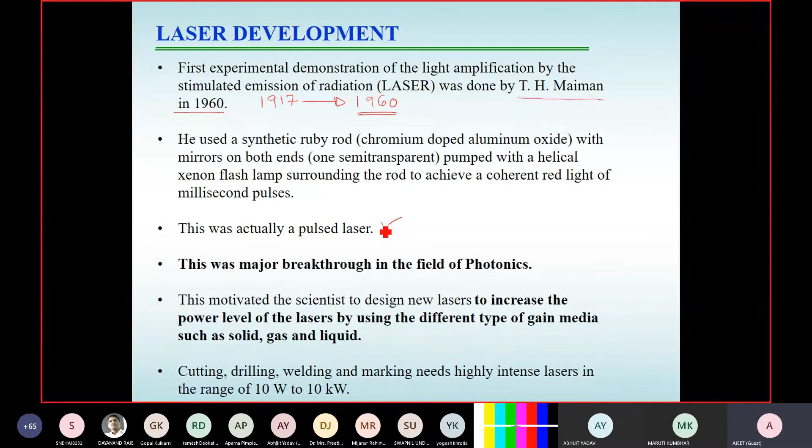The idea was given in 1917, but the first experimental working laser was invented in 1960 by Maiman. That was basically a ruby laser, in which he used a ruby rod as the gain medium. He polished both ends—one fully reflective and one transparent—just to make a resonator, and for pumping he used a helical flash lamp. So all three components were used, and this was basically a pulsed laser, not a continuous wave laser. It was low power at that time, but this was a major breakthrough in the field of photonics.

I read somewhere, maybe in the book written by Professor Ghatak, that the two major inventions of the 20th century were the laser and the fiber. These have changed our life tremendously, and most of us, including our faculties, can appreciate this because they have seen it happen in their lifetime. Earlier we had telephones, then mobiles came, and now today we are transferring video using this platform without any interruption. This has happened because of two things: lasers and fiber. So even when we talk about a semiconductor laser or any laser, the invention starts from the first major breakthrough—the invention of the ruby laser.

Yes, any question? Hello, please continue, sir. Okay, I thought there was a question.

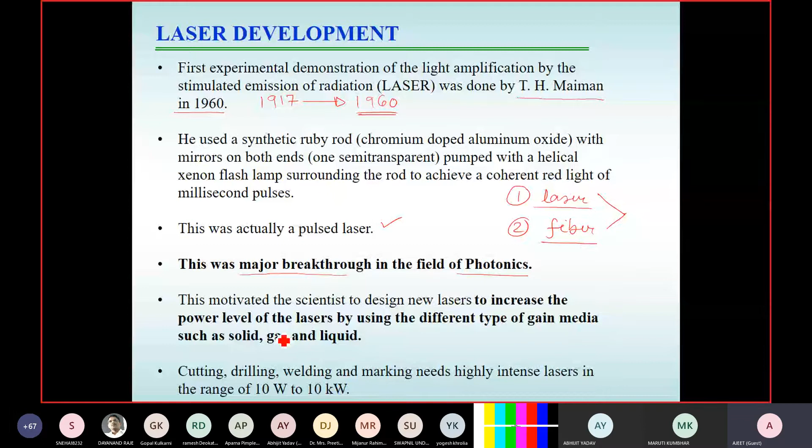So this invention of the ruby laser motivated scientists to come up with new lasers using different gain mediums like solids, gases, and liquids, and to try to increase the power level. Just to summarize the laser development, I have quoted this: different mediums have been used, and with these different mediums, you have different kinds of lasers working at different wavelengths, having a variety of applications—some industrial, some medical, and of course lab applications. But out of these, I'd like to address the carbon dioxide laser.

The carbon dioxide laser is one of the highest power level lasers available in the market. I'd like to mention this because the invention of this laser was made by a scientist born in India, Professor C.K.N. Patel. I recommend that if you have not gone through his life story, you should read about it—it will really motivate you.

This carbon dioxide laser was invented by this Indian-born scientist while he was working at Bell Labs. He did his BE from a government engineering college affiliated to the University of Pune, then moved to the US for his MS and PhD. After his PhD, working at Bell Labs, he invented this laser. Whenever I give a talk or interact with my students, I always mention the carbon dioxide laser, because it was invented by an Indian-born scientist who is still alive.

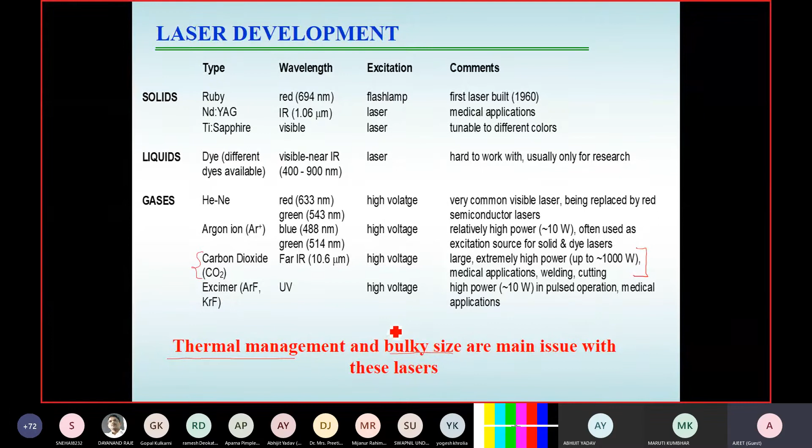Whenever you want to use transportation, or you want your system to be compact, and you want to make the laser up to a particular level, then you look for some substitute. One of the substitutes suggested is: why not look for a fiber laser?

After the invention of the fiber, around 1960 or 1964, there were so many inventions done in that period. In 1966, the fiber amplifier was designed. So they said that if you use fiber as a host material, and try to design a fiber laser or waveguide laser, that can be really handy for you.

One advantage is that they are not bulky, they are light in weight. If you are able to go up to the required power level, or even close to that, it will be really helpful for applications where you want to move your fiber from one place to another. The second advantage is the fiber has long range - you can easily use a kilometer fiber. You just pull it out at the right radius, and you can get a fiber of even 1,000 kilometers. So what this does is, using this, you can actually increase the gain medium length, which is not possible in case of a bulk laser. So your gain medium can be order of kilometers or meters, whatever you require, and your power level can get a large signal gain in that case.

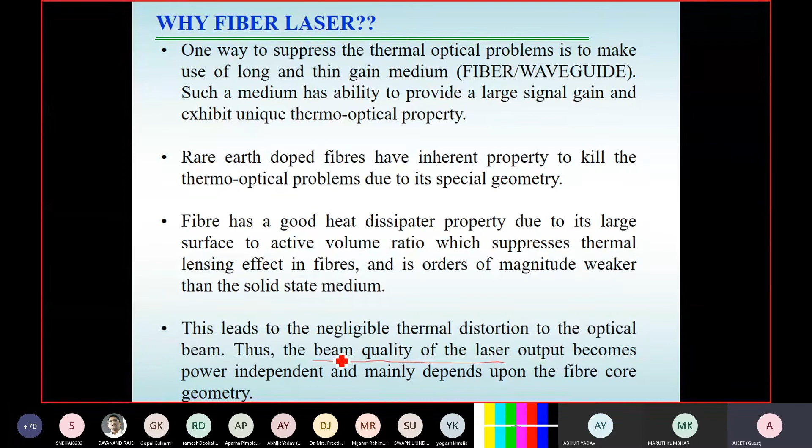The biggest advantage is it's a good heat dissipator because of its large surface to active volume ratio. These are certain points which basically work toward a good beam quality - this improves the beam quality of the laser. So it is suggested that if you try to make a fiber laser or waveguide laser, that can be really helpful in order to get very good beam quality, and that laser can be designed to be very light in weight, and easily transferred from one place to another.

So the same thing I've mentioned here - the lightweight and size, easy to handle - and because of this they have huge applications in defense industry, medical applications, and so on.

Now what you want to do is make a fiber as a host, or waveguide as a host, in order to make a laser. So if you are making a fiber or waveguide as a host, we need to discuss the basic understanding of the waveguide.

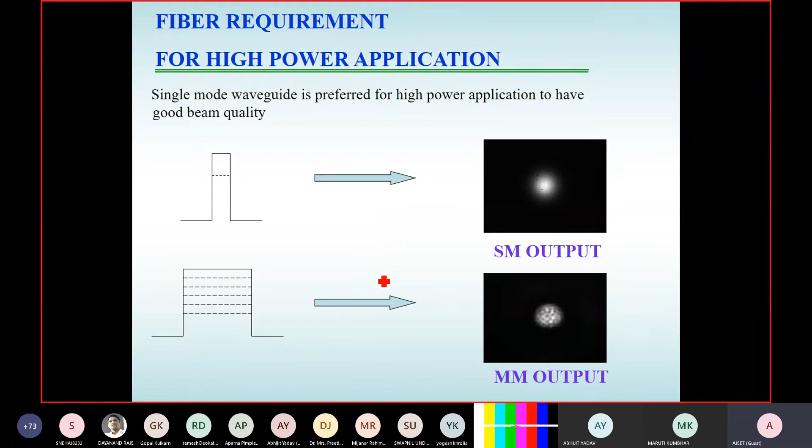But at the same time, I would like to mention that it is not that you cannot use multi-mode fiber for designing fiber lasers. Wherever you are not very much concerned about very fine beam quality, even a few-mode fiber you can use. But one takeaway from this slide is your fiber should be single moded if you want to make this fiber for the use of a fiber laser.

Now come to the other condition. What is the condition for the fiber to be single mode? You need to maintain that, so you should know about it. Okay, what is that condition?

If you look at the fiber, we already know there is a very important parameter called the V parameter. This V parameter should be less than 2.4048 if you're talking about the optical fiber. And if you're talking about the planar waveguide, it should be less than 3.14.

This depends on the numerical aperture, because it depends on a number of other parameters. So if the other parameters are like that, your A should be less than 3 micron here, and A should be less than 5 to 10 micron there. So the point to note here is, for single mode propagation, your core size should be small. There is a limitation that you cannot increase the core size beyond this for given other parameters like numerical aperture and operating wavelength. So this is about a single mode fiber.

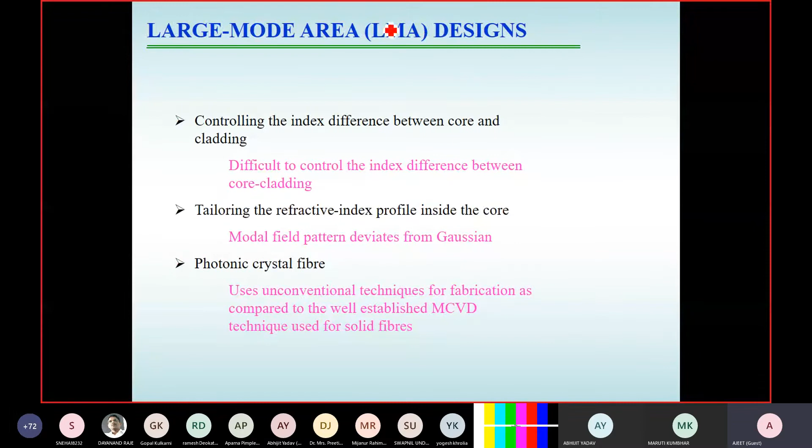In recent articles about fiber lasers, you will see them talking about LMA fibers, the large mode area fiber. I'm not saying this is the only parameter required for increasing the power level - there are so many things, like what kind of pump source you are using, the repetition rate, and so many other things. But one of the key features is the LMA fiber.

So LMA fibers give you large single mode operation even with a large core. Here I've just pointed out a few of them. There are a number of ways of doing it, so a few of them I have mentioned.

One way is by controlling the index difference between core and cladding. This is your refractive index profile - N1, N2, and A. You know the range for single mode operation: V equals 2 pi by lambda times A times n1 square minus n2 square raised to power 1 by 2, should be less than 2.4048. So since this product should be less than 2.4048...

One idea is you reduce n1 minus n2 and increase A such that it always remains in this range. So instead of the usual design, you design this kind of fiber with N1, N2, and A, ensuring you increase A by decreasing the difference between N1 and N2 to stay within the limit. But the problem is, since N1 minus N2 is very small, this fiber is very sensitive to bending. This is one way that has been used to increase the power level.

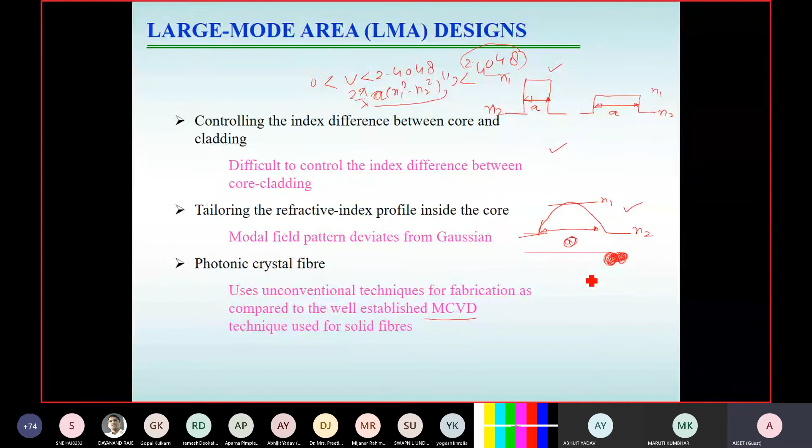So what we have done in the past few years is design a leaky fiber. We have taken the concept of a leaky fiber - what is a leaky fiber? I'll discuss in detail after a few slides. I think I have to be quick now because we have limited time. So for the leaky fiber, what we have done is said, okay, you have a core and a cladding, and you want to increase this.

Don't worry, instead of one mode, let's support n number of modes. You increase the core area, but at the same time modify the cladding. Normally the cladding is uniform, but you tailor the refractive index profile in the cladding, in the radial or angular direction, so it's not a conventional cladding. Instead, we use a different kind of cladding, keeping in mind that all modes will be leaky and suffer finite loss, ensuring the fundamental mode retains very nominal loss while all other modes suffer very high loss.

So here's the idea: if you launch light into a fiber, initially there will be 4 or 5 modes present. After propagating a certain distance L, since the higher order modes suffer high loss, they get filtered out, and you're left with just the fundamental mode. This is called the idea of mode filtering.

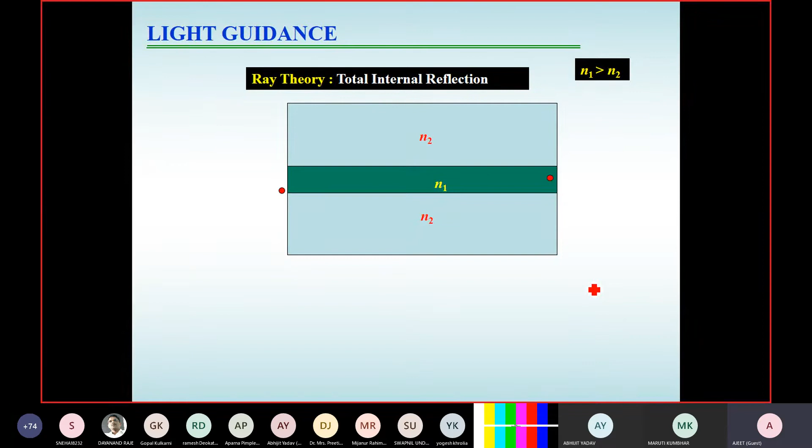So this is, I think, the ray theory. Quickly I'll move towards this. The light guidance in the fiber is understood by the ray theory. We already know the process of total internal reflection, which gives a rough idea of how light propagates through the fiber.

But the actual theory is the wave theory, in which you write down the Maxwell equations and solve them to see what the modes are. Modes are basically the field pattern which propagates along the length of the fiber or waveguide without changing its shape.

So if you have a refractive index profile like this, it gives certain solutions, and these are called the different modes. Each solution has a unique field profile. Just to compare it, you can think of this like the particle in a box problem. So this is about the mode theory.

So this is the waveguide theory, and the output of this waveguide theory is: once n1 and n2 are given, and you apply this, you find out certain solutions.

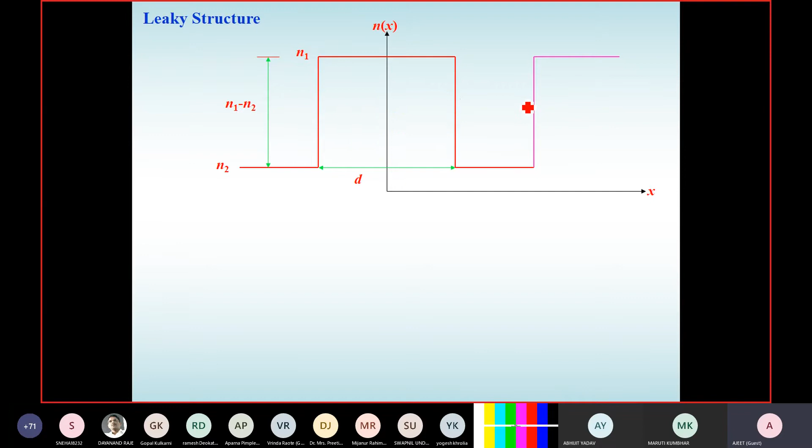So in this case, we know that for the fundamental mode, the loss will be minimum because the propagation constant has the highest value.

Now what about the distance? That advantage is always there for the fundamental mode, but we always want to further increase the loss for the higher order mode. So if you use this kind of structure, the distance will be same for all the modes, almost identical from the high index region.

So in order to get a better difference in loss between fundamental and higher order mode, we said instead of using this design, what if you use this kind of design instead?

If you use this kind of design, the fundamental mode, which you want to retain, will see the high index region at a certain distance somewhere here, and the next higher order mode will see the high index region at a much smaller distance compared with the fundamental mode. So this kind of structure creates a large difference in loss between the fundamental mode and higher order mode.

So this principle basically we have used in order to give the design in case of waveguide and fiber. I think I have two minutes left for these slides, so I will quickly move through this. The first slide we give is for the planar waveguide structure, and I will not go into the mathematical detail which I've already written, since we have only half an hour.

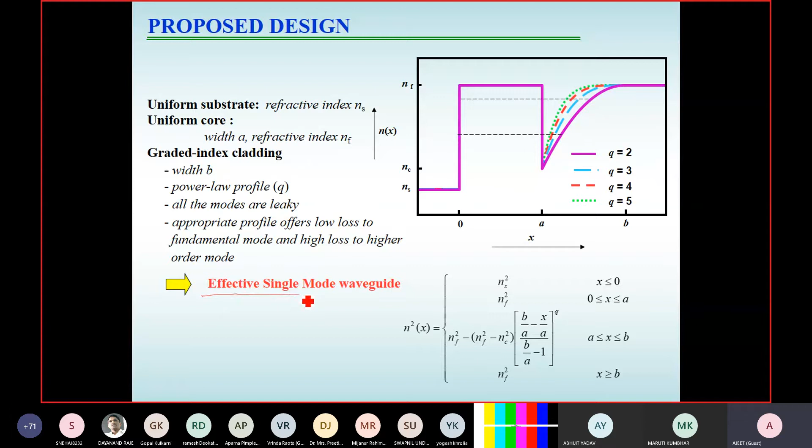So this was the first design we gave for the planar structure, not for the fiber structure. We said you take a substrate which is uniform, and the core is also uniform—you take a large, uniform core. Now instead of a uniform cladding, you take a graded cladding, with a profile defined by this refractive index profile. This kind of structure will ensure a high difference in loss between the fundamental mode and higher order modes, and will show effective single mode operation. We don't say it is single mode operation—it is effective single mode operation, because it shows single mode behavior only after a certain propagation length.

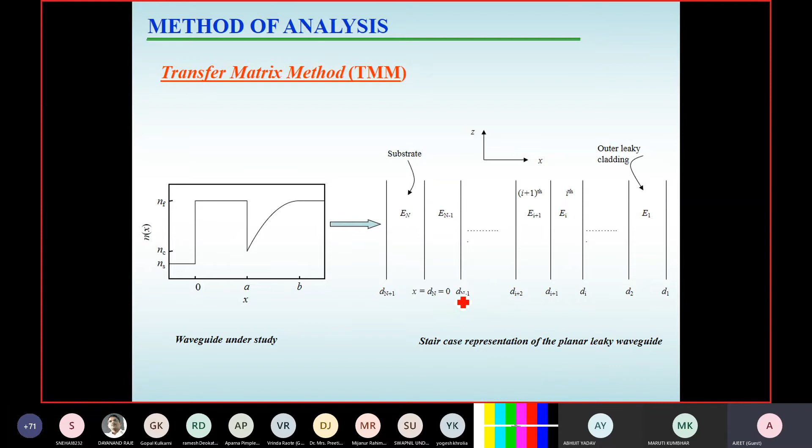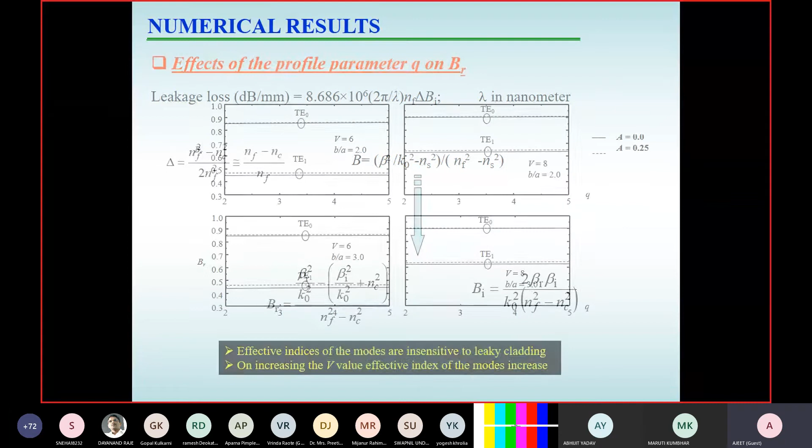See what we have done. First, we tried to see if there is any difference, any effect of this profile parameter, this structural parameter on the cladding, on the beta, which is the real part of the propagation constant. You can say this is the effective index of the modes. You can see here that the N effective is not going to change with this Q value.

This is good because the dispersion property of the new design and the normal cladding structure are both the same. So we are not worried about any new unwanted effects. We have checked this for various values of the V parameter and the B by A parameter, and even for various designs like symmetrical waveguide and asymmetric waveguide.

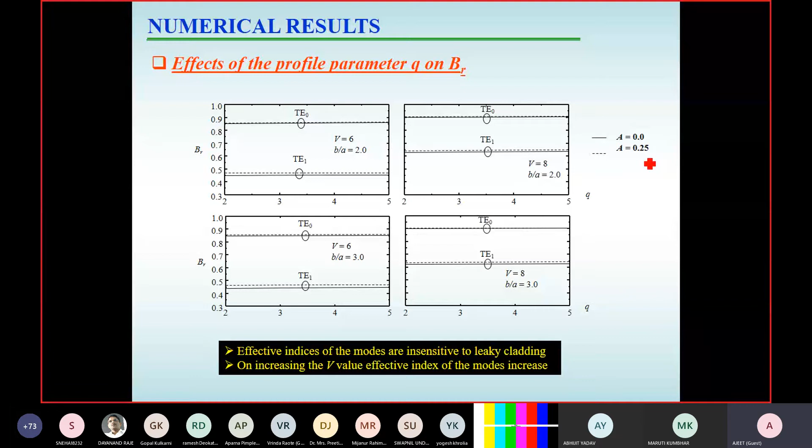Now next we have seen the effect of the V parameter. We have done it for 6, 8 and 10, and we got the obvious result that when you increase the V value, basically it means you are giving tighter confinement to the light inside the core. So most of the power will be there in the core, and a small amount of power will go to the cladding, so the loss will be small.

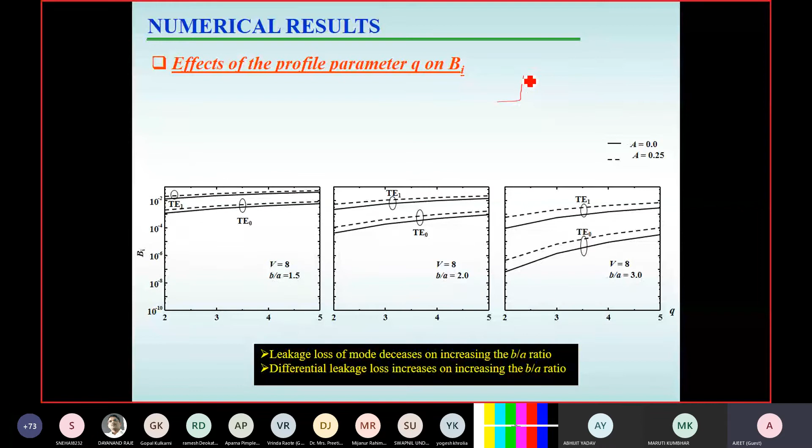Next, we have shown the effect of the B by A parameter. What is B by A parameter? This is your A and this is your B. So small B by A means a very steep profile, and large B by A means this kind of profile.

So it's very much clear from here: if you take a large B by A, the loss will be small. For the large B by A, just look at the loss, it is small. So whatever the expected result, we got it, but another point you can note from here is that, for all these design parameters, the differential leakage loss is almost the same across the entire range.

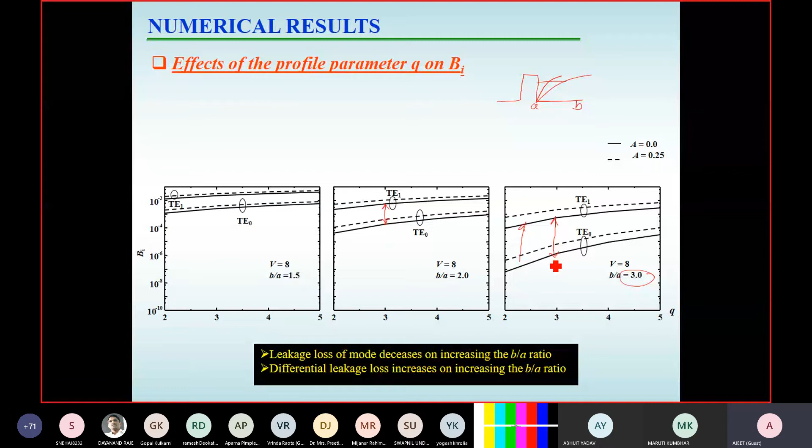If you want to change the differential leakage loss and absolute leakage loss, you can tune it using the B by A value. So if you increase B by A, it will basically increase the differential leakage loss for a given Q value. If B by A is changed, here see the differential leakage loss is this one, and here it is this one. So if you are designing some waveguide and you see that you need to change the differential leakage loss, you know the idea is just to tune the B by A value.

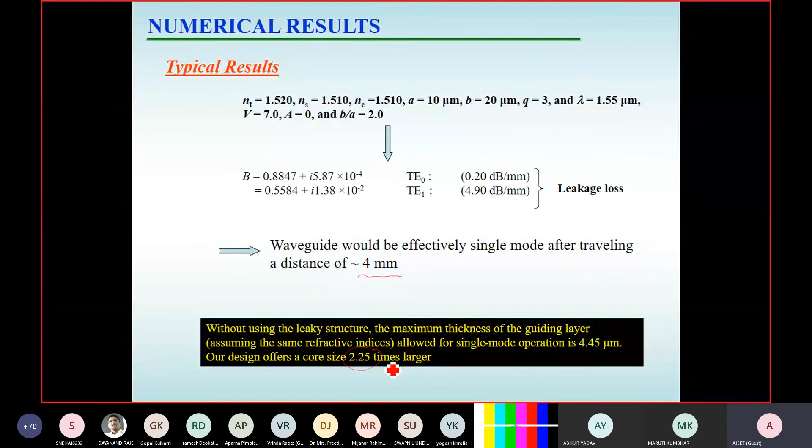So we have done certain calculations, and based on these calculations, you can say that this kind of structure is able to show effective single mode operation with only a 4 millimeter propagation distance. And the size we are getting here is almost 2.25 times larger than the conventional structure size.

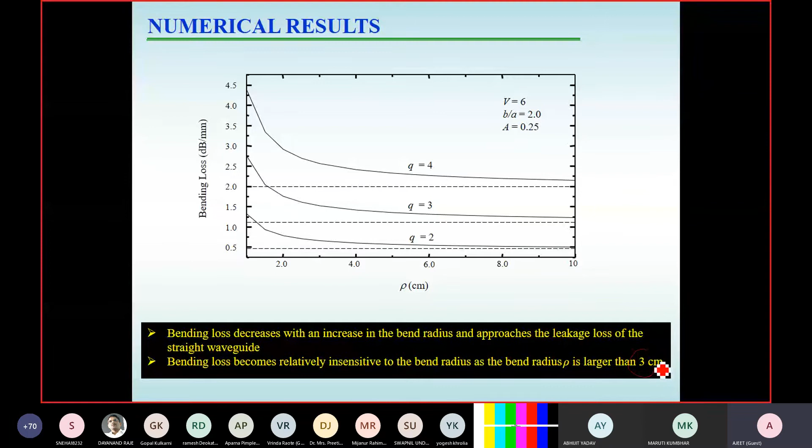Bending calculation we have also done. We tried to find out the bending radius beyond which the bending loss is insensitive. So we found it out: it is a 3 centimeter bending radius.

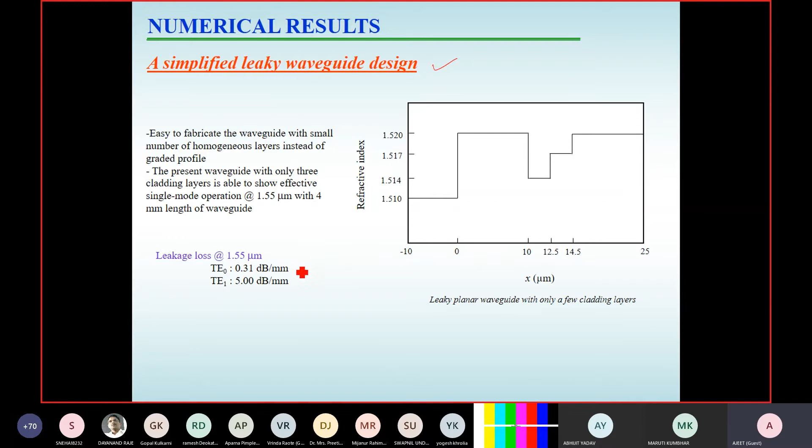Not going into detail, but you always need to come up with a simplified design so that it can be fabricated. So we have also given a simplified design. Instead of giving the graded index, we have given this kind of step structure, and for this step structure we have also shown that you can get a similar kind of loss profile to get a better result. Okay, so this is about the planar waveguide.

Why have we given this structure? Because we know that experimentally it is always possible to fabricate low and high index regions instead of a graded index, so we have given this kind of design.

We have changed the value of the low index region, governed by a Q value. Why have we done this? Because if you just randomly try something, it will not give you the idea, since you have to analyze all the parameters in detail if you are doing theory.

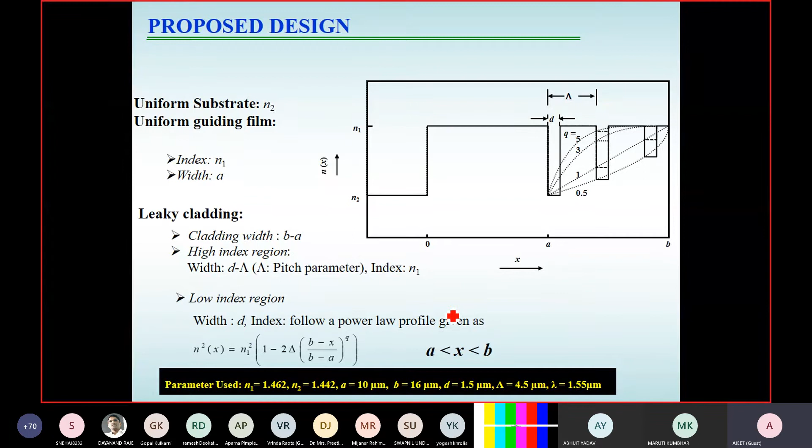After giving this kind of design, we got a result that was initially really disturbing, because we were not getting what was expected. The expected thing is that the lowest loss is for the fundamental mode.

Then you have the loss of the next higher order mode, and then the loss of the next higher order mode. When I tried this, I saw that initially the same trend follows, but then this loss was crossing the loss of the next higher order mode, which was initially disturbing.

When we realized it, we found out it is because of a special effect of physics called resonance. Because of this resonance, a new idea came up for a new design, and this actually solved our problem.

After analyzing, we found that if you take Q equal to 1, that gives very high loss to the higher order mode, 10 dB per mm, and just 2 mm length of fiber can filter out all the modes, with core size almost 3 times larger than the known one. This gave the idea about how much waveguide length you can use for single mode operation.

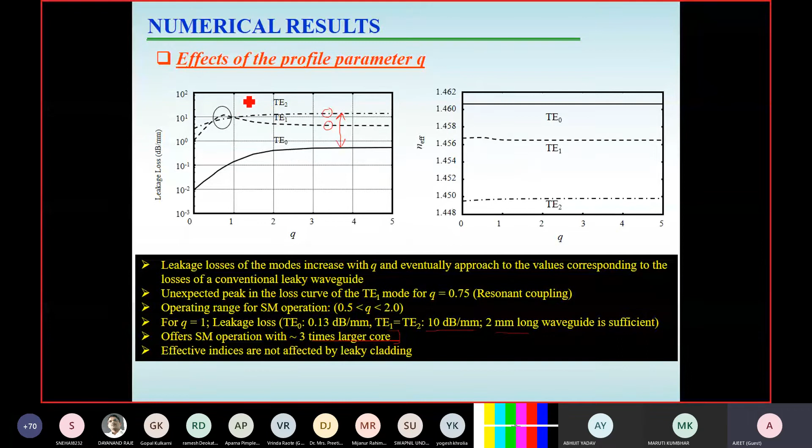But beyond that, it gave us a new idea to design a fiber, and we used it in the fiber design, also after some time.

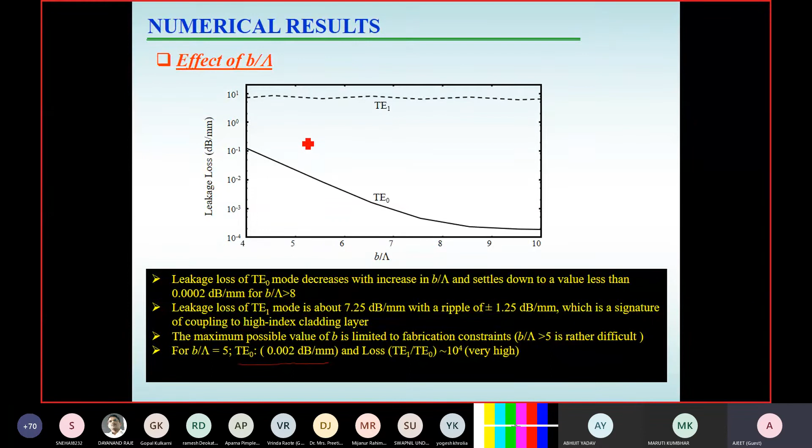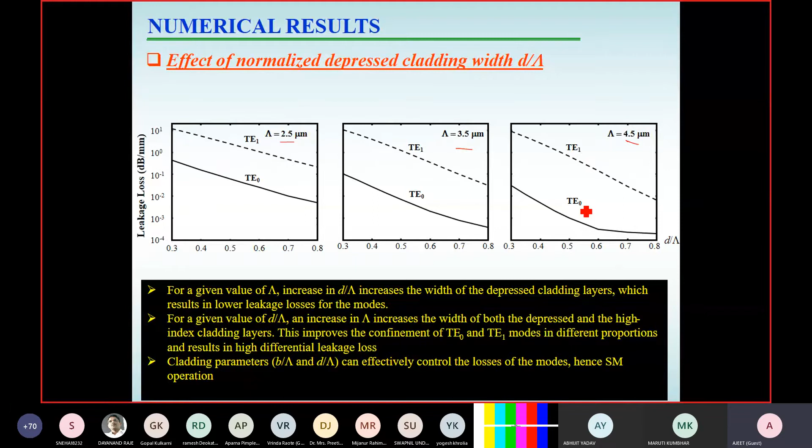So all these calculations basically help the designer come up with a better result, up to the requirement of the experimentalist.

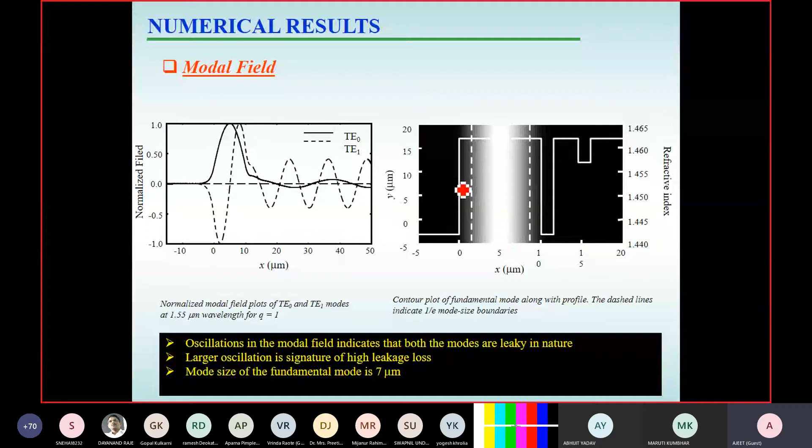Here we have shown the field profile of the fundamental mode and the first higher order mode. You can see huge oscillations in case of the first order mode, but there is also some oscillation for the fundamental mode because both are lossy. Here we have shown the contour plot of the well confined fundamental mode inside the core region.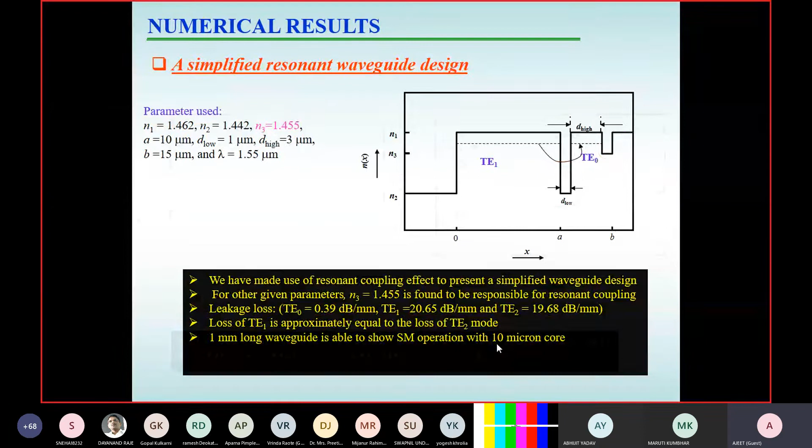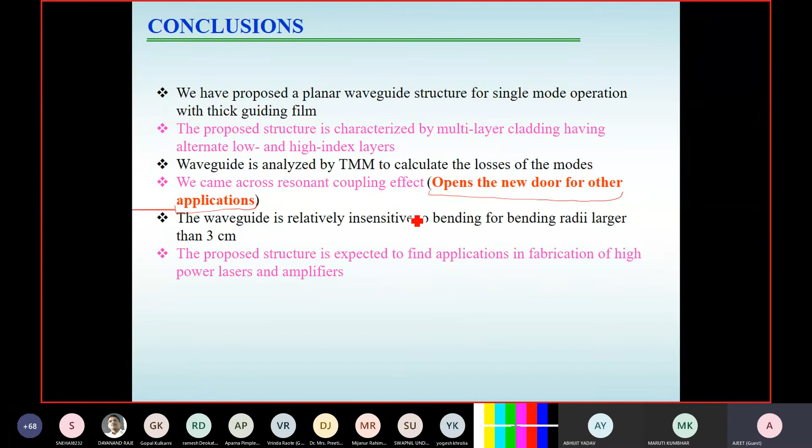Again, for this structure also we have done the bending analysis. One of the key results was, if you're careful about the result you are getting, sometimes you get very interesting results, and if you analyze it beautifully, it will help you come up with some new designs, which may even simplify your design. So we came across this resonant coupling.

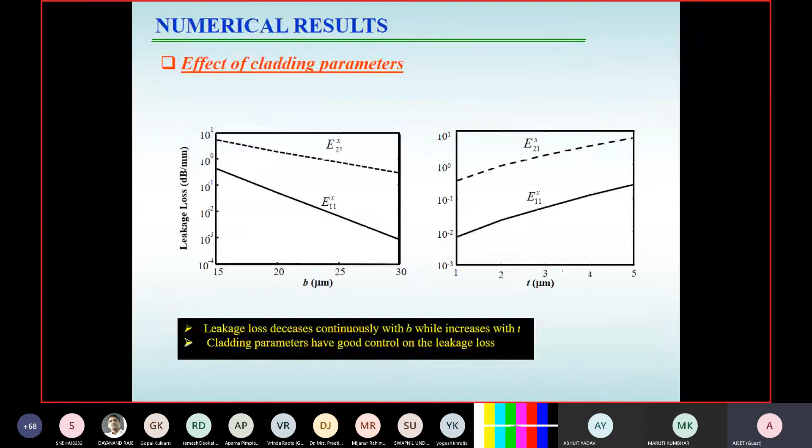I think we don't have much time, half an hour, so I'll skip this, the 2D structure. In the 2D structure, we have also given the large mode area designs.

Before I skip this one, I'd like to mention about this 2D structure, that it also basically gives you single mode operation not at a single wavelength, but over a range of wavelengths. Because of the special structure, it gives you a wavelength range of 750 to 1600 nanometer. This kind of behavior is called extended single mode operation, which you especially find in case of the photonic crystal fiber, because of the spatial geometry of the cladding. Here too, because of the spatial cladding design, you see single mode operation in a range of wavelengths, so you are not restricted to a particular wavelength only. In the range of wavelength, you will find the extended single mode operation.

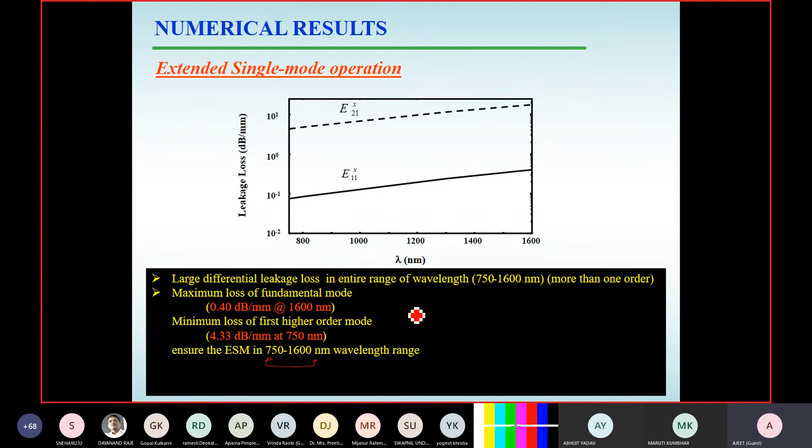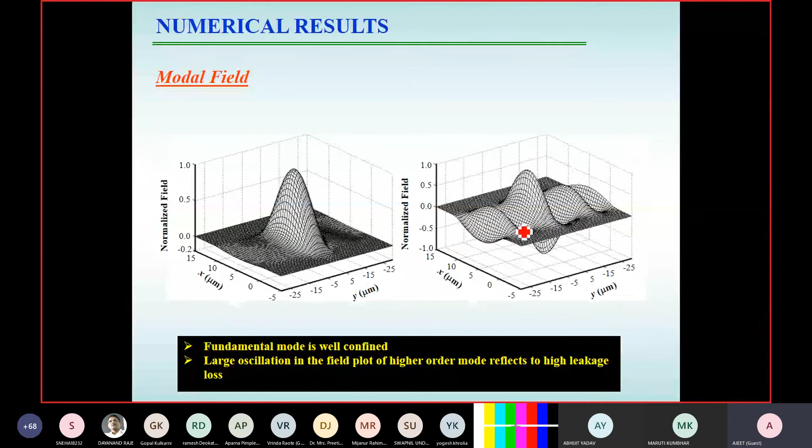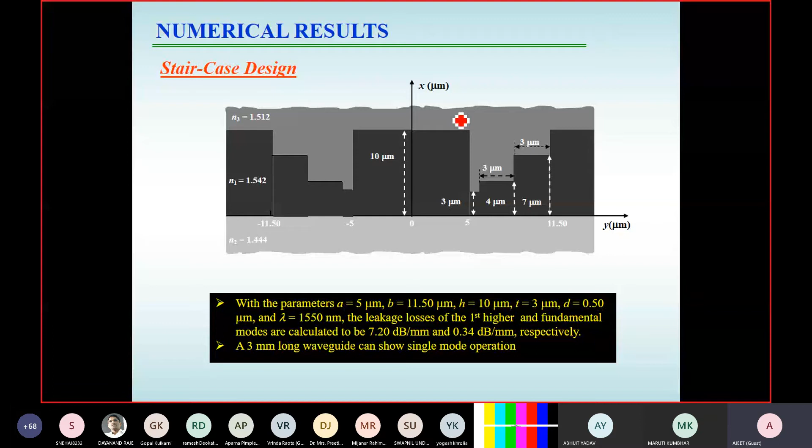These are the typical results we have shown. We have just shown here that your channel waveguide can give you single mode operation with almost 3 mm length, because it ensures a very huge loss, close to 20 dB, to the first mode. Again, we always give a simplified design, so we have also given a simplified design, and that design was also able to show single mode operation.

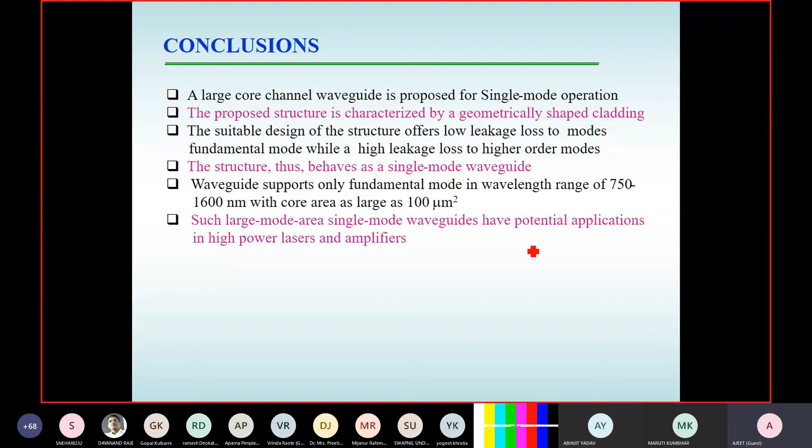So the conclusion is, whatever design we have given, it is not very sensitive to the parameters. They are within the accuracy of the experimentalist, and you have flexibility with the parameters. So whenever any experimentalist is willing to design these parameters, they can see, based on this analysis we have already done, and tailor their design. So this is again the channel waveguide.

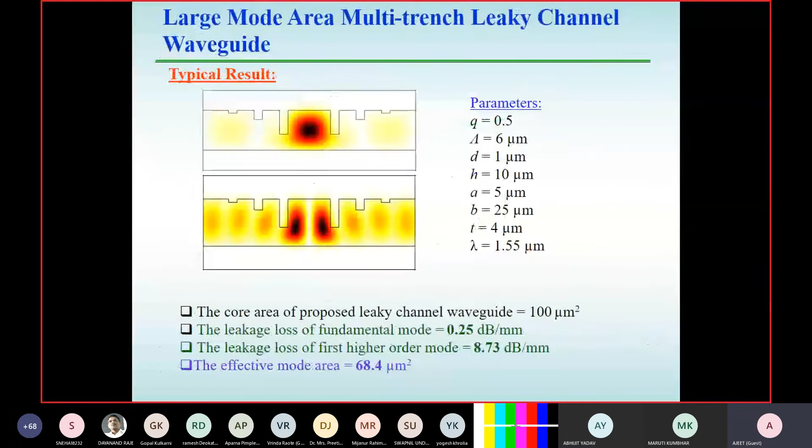I will leave this because I quickly want to come to the fiber structure. Multi-clad fiber structure: this is the structure we have given in case of the fiber, where we have taken the uniform core and the leaky cladding. Again, the leaky cladding has two parts. One is the low index region, this is the low index region. The low index region's refractive index changes, and it basically follows the power law profile given here.

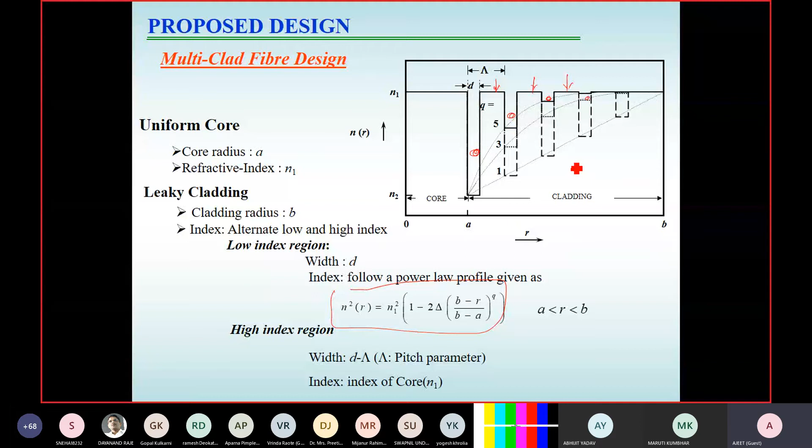This power law profile, and there is a high index region. These are the high index regions. So we have the low index region, and these are the high index regions. The low index region will give you the confinement, and the high index region will give you the loss. So we have tried to analyze the structure with the Q profile, and here you will see the difference.

You see the difference is even in the order of 3. This means the loss of the first higher order mode and fundamental mode is very large, something about 10³.

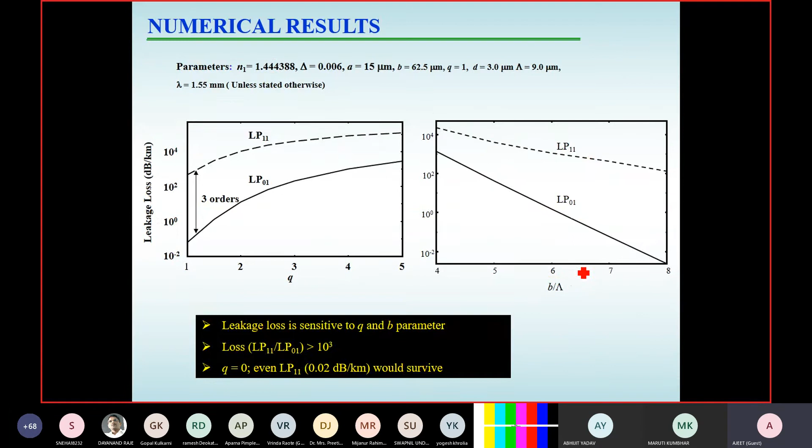So we have also seen the effect of the B by lambda parameters, and from here we have analyzed that if you want to increase the differential leakage loss, it is always better to tune the B by lambda parameter. We have also seen the effect of other parameters like D by pitch.

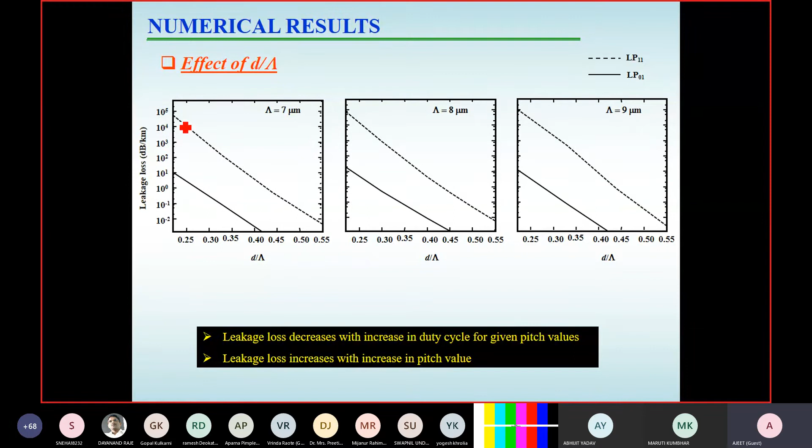It is quite obvious that if you increase D, which is basically the width of the low index region, so if you increase the width of the low index region, meaning you are giving more confinement, the absolute loss will keep on decreasing.

After that, we have seen the effect of the numerical aperture, and this is also quite obvious. In the beginning I mentioned that if you decrease this N1 minus N2, it will be more bending sensitive. Similarly here, if you increase this difference, the loss will decrease, meaning it will be even less sensitive to the bending.

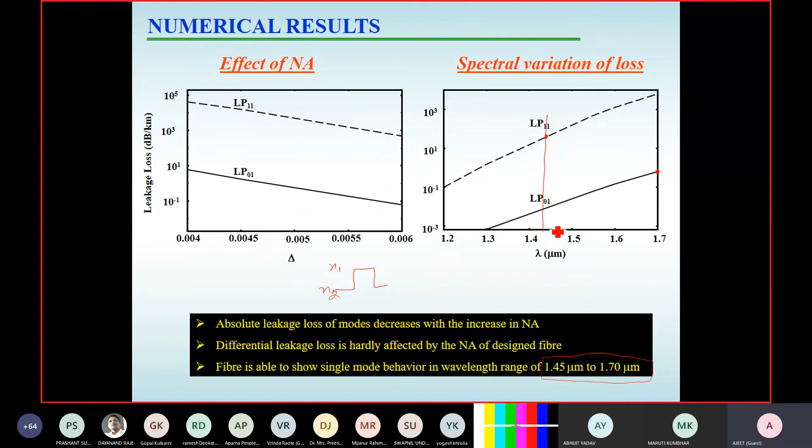We have also seen the spectral variation of this structure, and this structure also shows this kind of behavior: single mode operation, not only at a single wavelength, but in the range of wavelength from 1.45 to 1.70, because the maximum loss of the fundamental mode is even less than 0.1 dB, and the minimum loss of the LP11 mode is close to 5 dB at around 1.45.

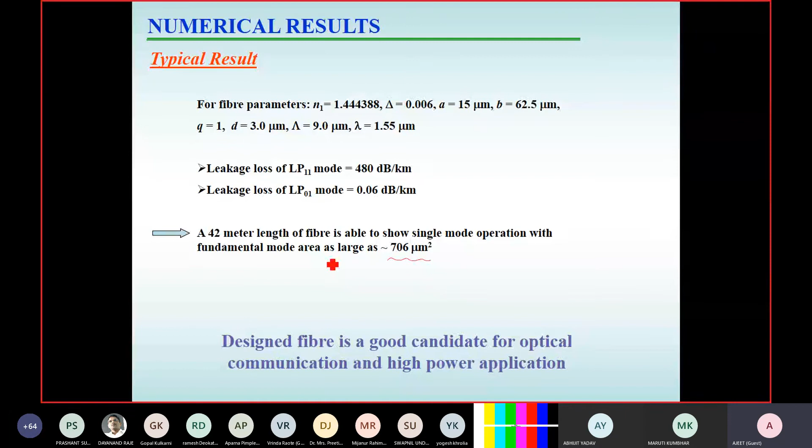So in order to explain the principle, whatever I have explained was just based on simulation. In order to verify this, we had a collaboration with the University of Nice. At that time we gave our design to our collaborator. This design we made was a very simple structure.

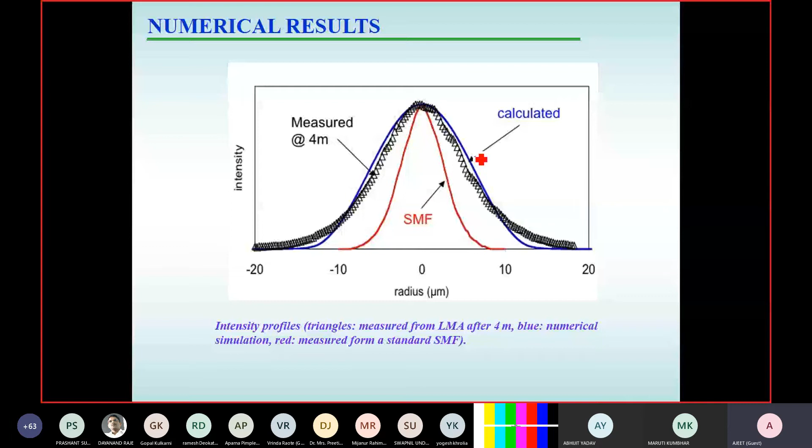We made a comparison between the theoretical and experimental intensity curves. This is the typical intensity curve of a single mode profile, giving you a small mode area. This was the intensity curve of the experimental result, and this is the theoretical curve. So there is good agreement between the theoretical and experimental observations.

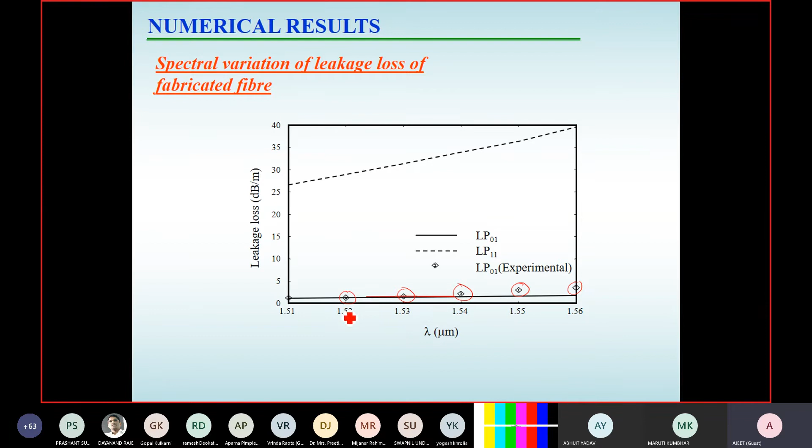The result we saw earlier was for a given wavelength. We changed the fiber length and observed the mode filtering profile. So the mode filtering principle is also very much obvious, and the loss value we have seen is also in very good agreement with the theoretical one.

So this is one of the ideas—you can design a fiber which can give you single mode operation with a very large core, and that can be useful for designing fiber lasers where you want to increase the power level.

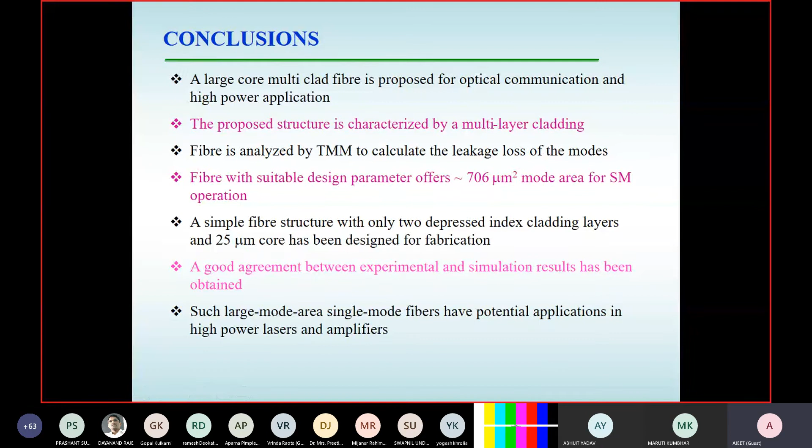So now the next design we have is the leaky fiber, dual core leaky fiber, and this was based on the idea of the resonant effect which we have observed in the case of the planar waveguide. What we have seen is that if you simply tune the value of this layer from lower to higher value, at certain point you will see that the effective index of the first higher order mode is matching with the mode supported in this guided structure. So for that particular point, there is a huge transfer of power. There is a resonance coupling between the inner core mode and this outer clad mode, and this ensures the quick transfer of power from the core to cladding.

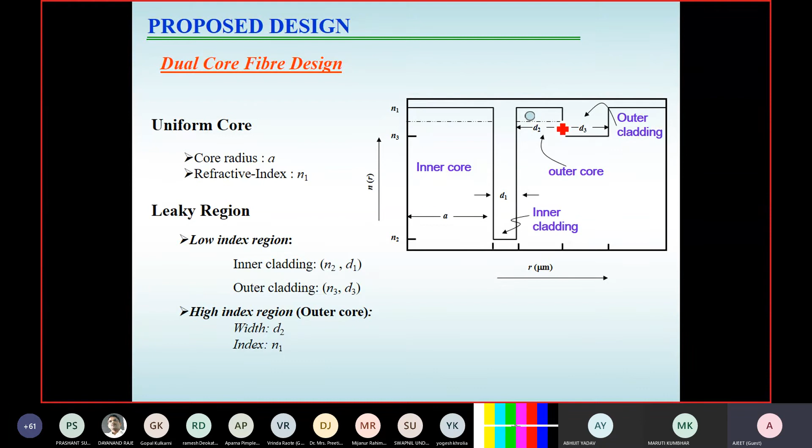So we have encashed that concept, and it has basically benefited us, because in this case we need not worry about the different profile parameters. We just need to use one inner core, and in the cladding we have two low index and one high index regions. It's the simplest design, good for any experimentalist to fabricate this kind of structure. So the observation of this special effect has given us a simplest design.

Here's what we have done. First, we have changed the value of N3 from a starting range to a maximum, from N2 to N1. If you see, initially the loss of the fundamental mode is very small, and for a given structure, the loss of the fundamental mode is the lowest one. Then comes the next higher order mode, then the next higher order mode. But if you keep increasing the value of N3, there is a crossing point, beyond which the loss of the fundamental mode will change. After that, the loss of the first higher order mode will not be there in that position. The loss of the next higher order mode takes that value, and after that, the value of the next higher order mode will come.

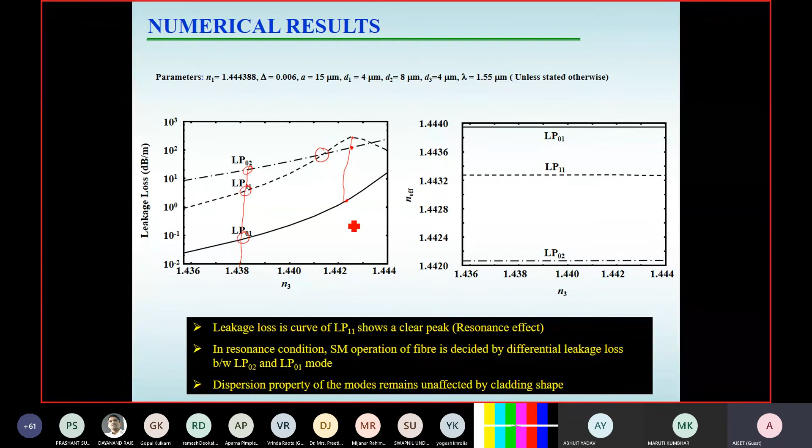So the sequence is changed, and this is because we have ensured a resonance cladding effect in the case of LP11. This has given us the simplified design, as well as the idea to filter all the unwanted modes in a very small propagation length.

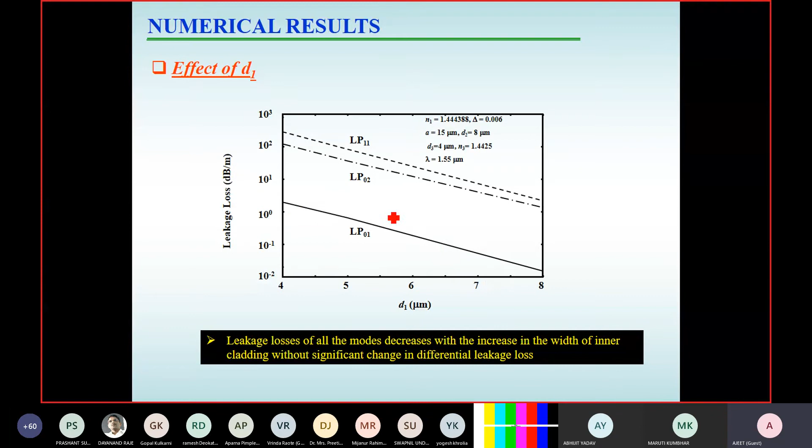We have seen the effect of various parameters like D1. When we increase the D1 parameter, due to better confinement, because D1 is the width of the low index region, of course the loss will decrease. So that is decreasing here.

Then we have seen the effect of parameter D3, which is the parameter of the outer cladding region. Let me clarify, D3 is not the high index, D3 is the low index region of the outer cladding. What we have seen is that by changing this D3 parameter, the loss of the fundamental mode kept decreasing, because of course you are increasing the low index width.

But there is a crossing in the leakage loss of the two modes we have observed here, and this is again one of the signatures of the resonance effect. These crossing points actually help us give a good design which can be easily fabricated, easily designed with the experimentalists.

See this point and this point. At this particular point, D3 is equal to 2.4. Of course, the loss of the next higher mode is very large, that is good, but at the same time, the loss of the fundamental mode which you want to retain is also very high, 5 dB. So this is not acceptable.

Now coming back to this point, you see the loss of this mode is not so high, but still very good, it's 55 dB per meter. It means you don't even need a meter length of fiber. Just less than half a meter of fiber can solve your problem.

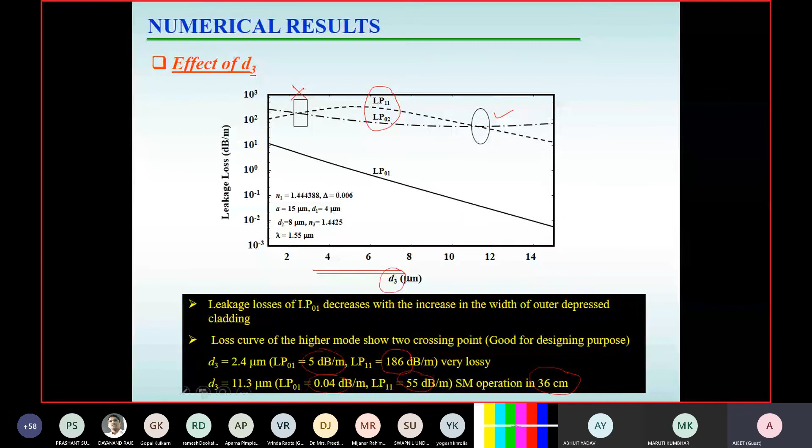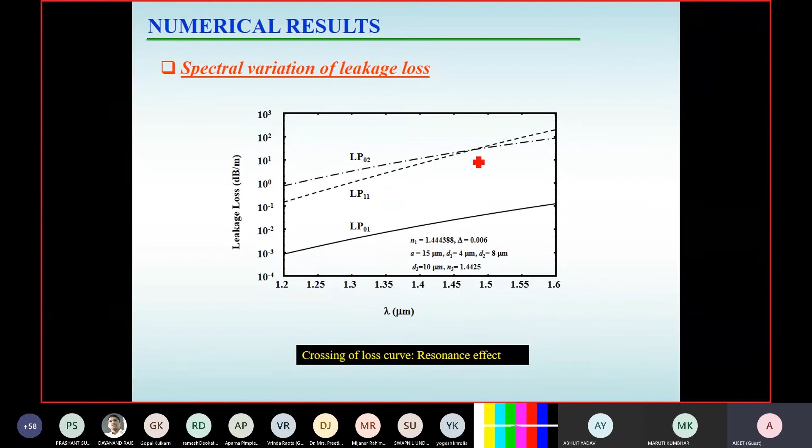It can show you single mode operation, and at the same time the loss of the fundamental mode is small, which is 0.04 dB. We have utilized this structure and also seen the spectral variation of the loss. Again you see the crossing of the curve in the LP02 and LP11 mode. This is again the signature of the resonance effect which we have tried to utilize.

So now I think only 7 minutes.

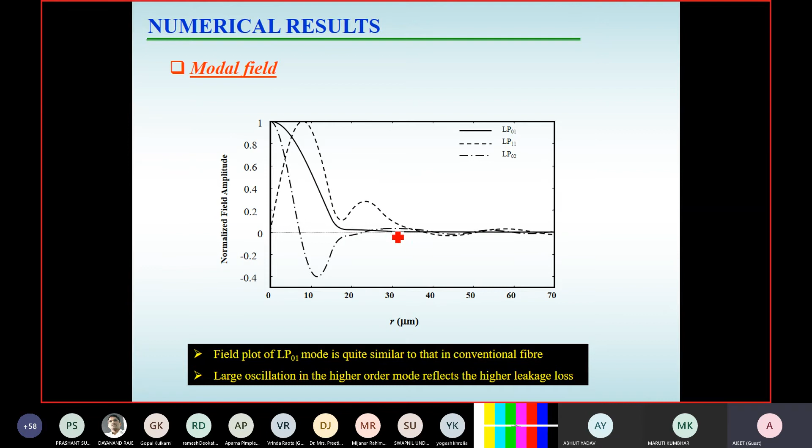So the modal field pattern we have seen. See the fundamental mode is well confined, and then we have the higher order mode which is showing large ripples, a signature of the large loss in the higher order mode. This is a well confined fundamental mode.

Now this is not about fiber lasers, but the same idea, which is the resonance effect, we have used in another application called gain flattening. If you want to use your amplifier for DWDM or WDM applications, you always want the amplification, and you want the amplification at the same level. But if you look at the gain curve, it is not flat.

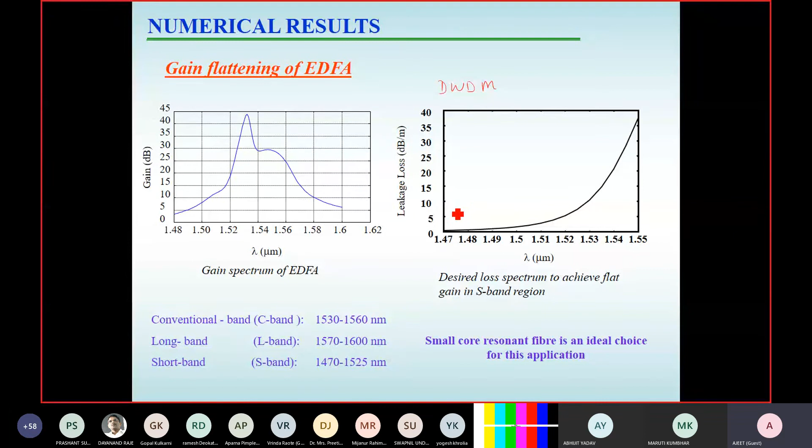So there's so much effort done to make a flattened curve. In order to get the flattened curve, the idea is you can flatten it with whatever the slope of gain is there. If you get the same almost loss curve, you can get the flat curve. So we know in case of resonance there is a sharp change in the loss curve, so we have utilized this design.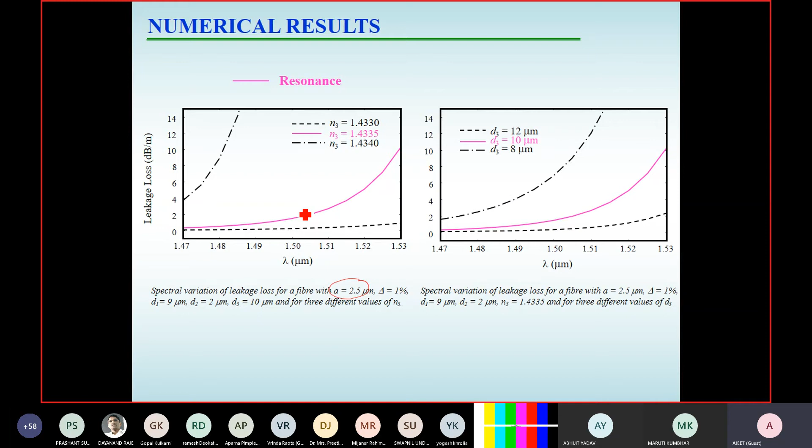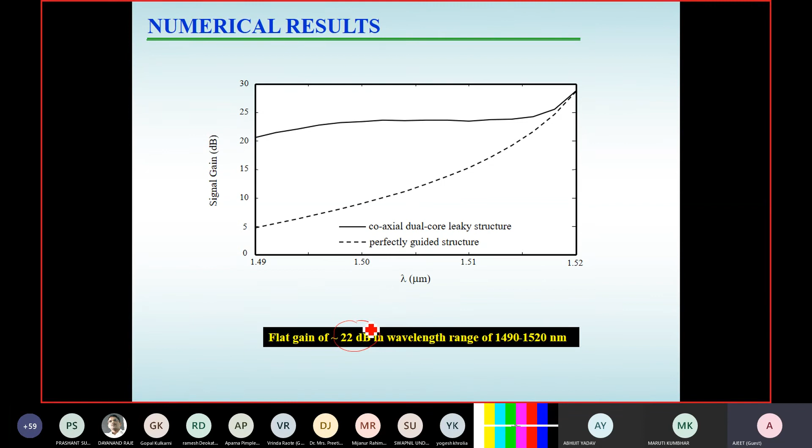Quickly I will tell you, with a small core region we have changed the values of N3 and tried to find out the suitable loss curve. Finally you get the loss curve which is giving you the flattened gain, which is having almost 22 dB gain. So the basic principle can basically help you in designing the fibers as well.

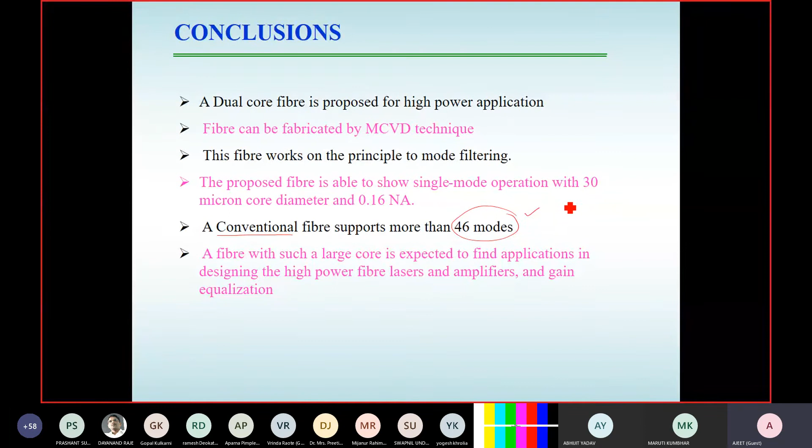After that, a lot of work is nowadays being done using specialty optical fiber, also called photonic crystal fiber, which has two types. One is index guided, and one is band gap guidance. In case of step index, you have a solid core. In case of band gap, you have a hollow core, and in the cladding region you have a periodic arrangement of air holes or rods running through the entire length of the fiber. This is PCF, which from the last few years has become a major research area.

Number of researchers are basically working on photonic crystal fiber because it has so many degrees of freedom, so many design parameters. One is either you go for a solid core or band gap. Even in a given design, the solid core, you have what kind of geometry you are using, whether hexagonal, rectangular, or triangular, and whatever shape, whether circular or elliptical, or maybe in the first ring you have circular, in the second ring elliptical, or different size of holes. All that, plus what pitch value you use, these design parameters have so many degrees of freedom which increase its applications.

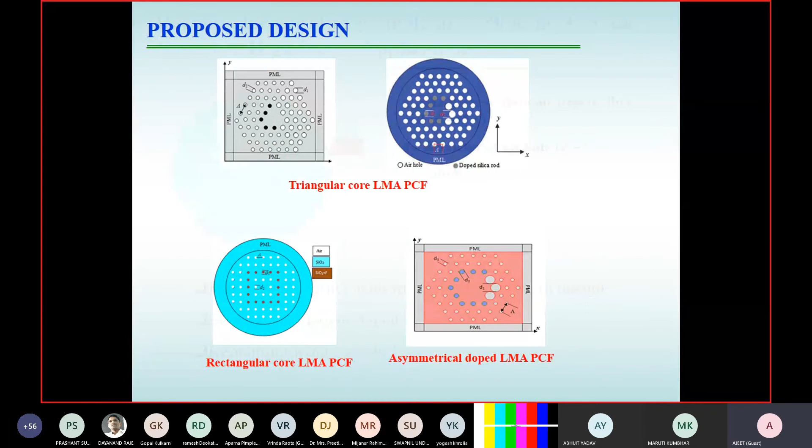I will not go into detail of the calculations we have done, but of course we have also used this photonic crystal fiber to increase the area. In some of the results, you'll see that you find the area close to 2000 micrometers square, which is much larger than what we just discussed a few minutes before.

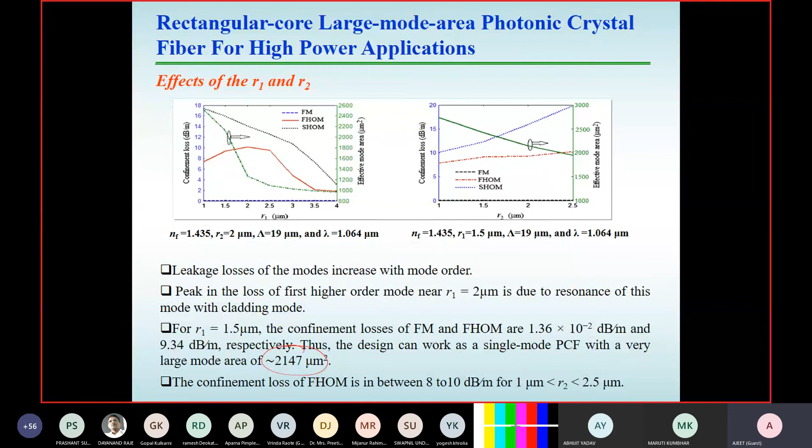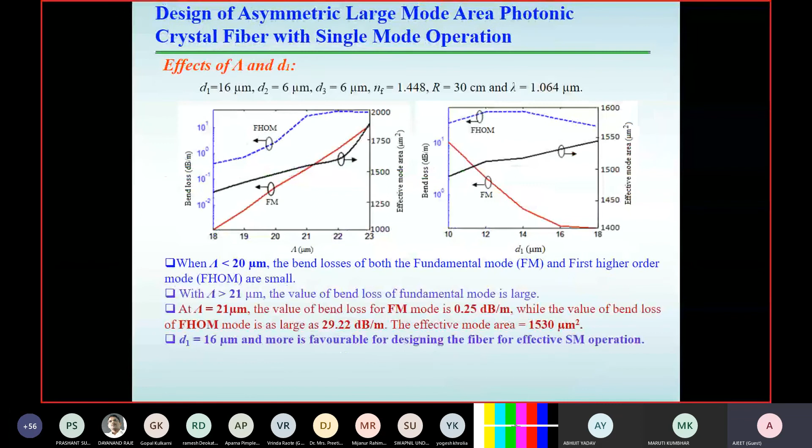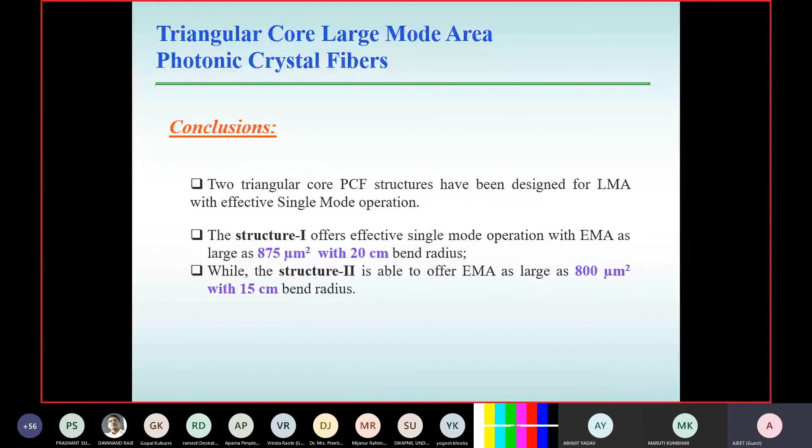Only one point about the PCF structure is that the method of fabrication is there, but the number of holes and all this we have to use carefully. So from the design point of view, you have to be very careful. But in case of MCVD, it is a well-established structure. So these are the different designs we have given even in the PCF. This is all about the contribution we have given in designing the fiber, the waveguide, or 2D waveguide, in order to increase the power level of the host, by supporting the large mode area design.